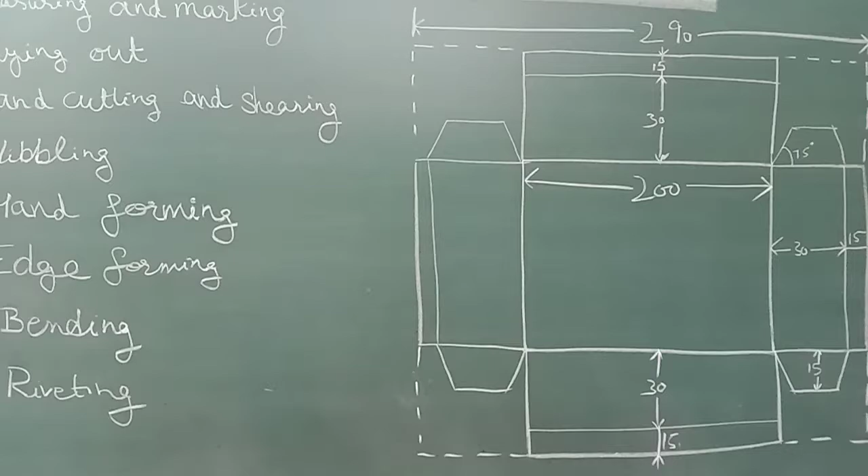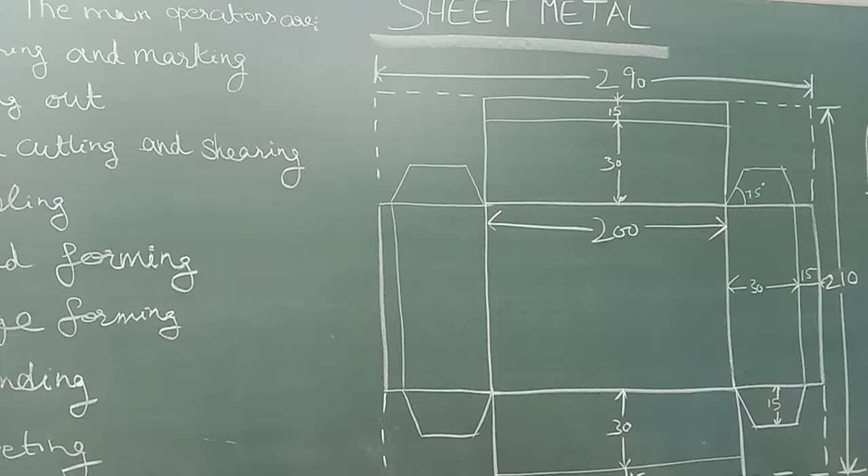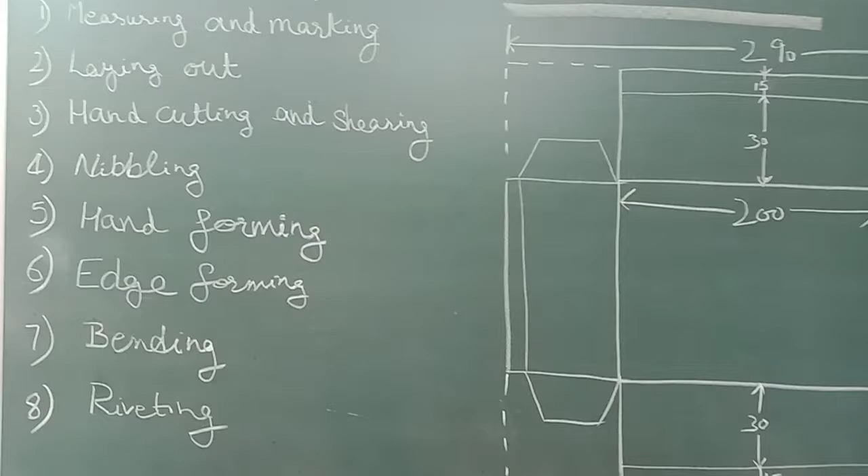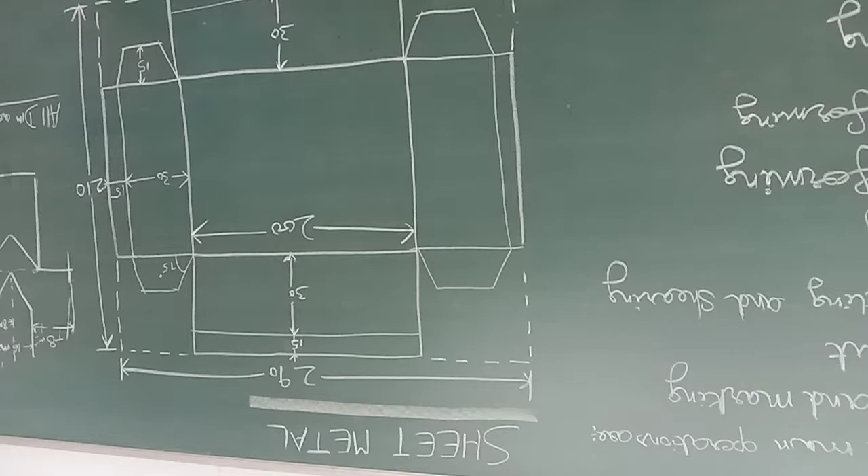And today we are all present in our sheet metal shop. Sheet metal shop is an important part of workshop practice, and sheet metal is associated with working of thin metallic sheets with the help of hand tools and simple machines. While doing work in the sheet metal shop, it is necessary to know the working of hand tools and simple machines. Sheet metal finds its application in a variety of work in houses, agriculture implements, transport, etc.

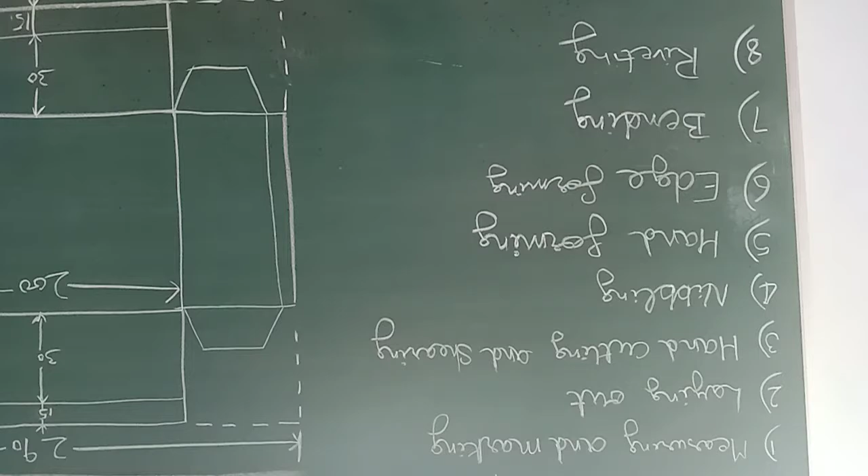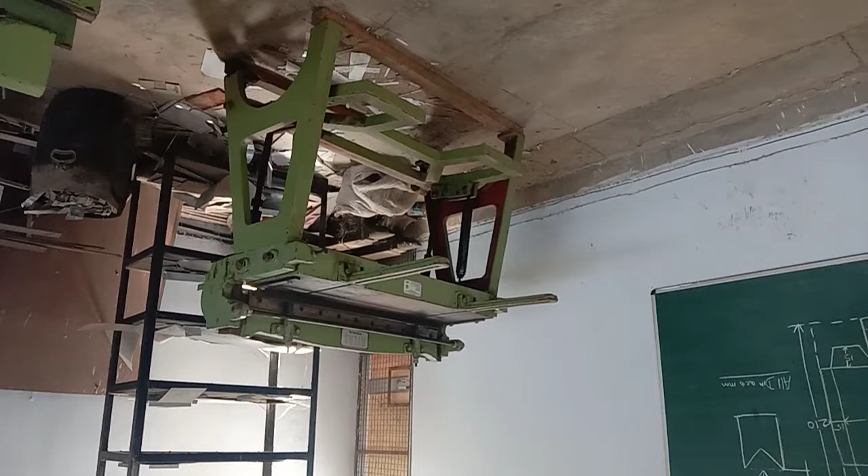In sheet metal shop, we use a variety of sheets, that are ferrous steel sheets and non-ferrous sheets, and steel sheets are further subdivided into categories: coated sheet and uncoated. Coated sheets are galvanized and uncoated sheets are plain sheets. Now, the sheets we use are defined further. First are steel sheets, mild steel.

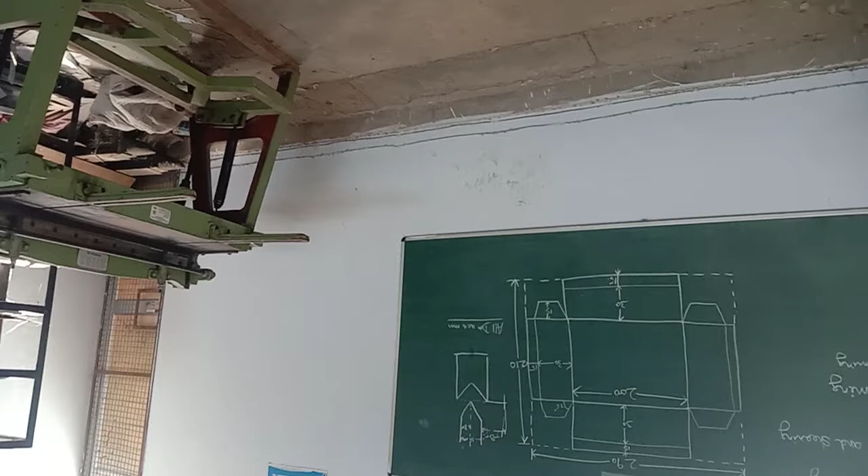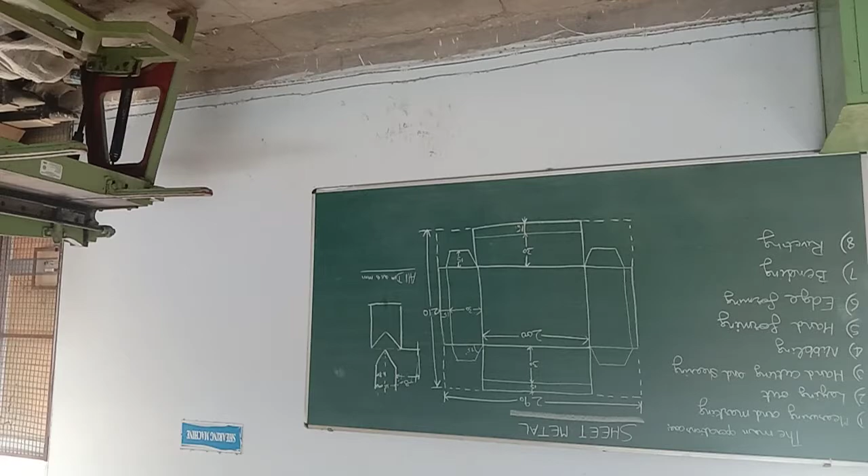Mild steel sheets, due to being uncoated, are non-resistant to corrosion. By protecting them with paint, these sheets are used for making water tanks, fabrication, and agriculture implements. Now, further, we go to stainless steel sheets. These have a silver chrome appearance and are high grade steel with chromium, nickel, and traces of manganese. The stainless steel sheets are easily welded. It is used in dairy, food processing plants, etc.

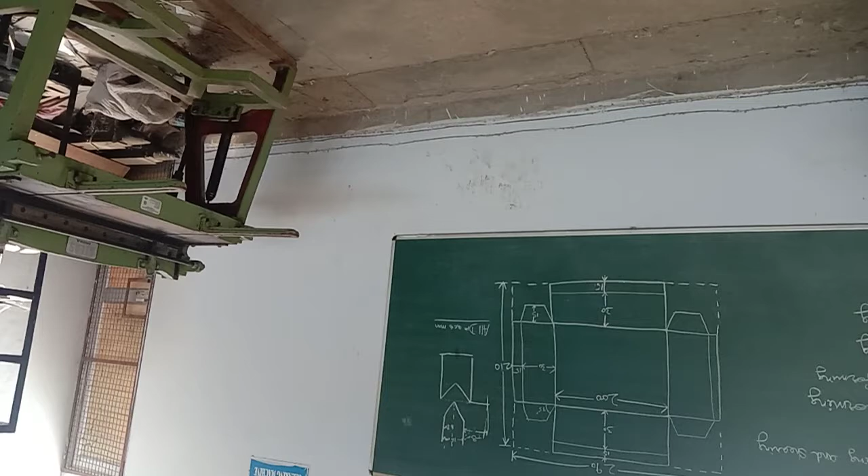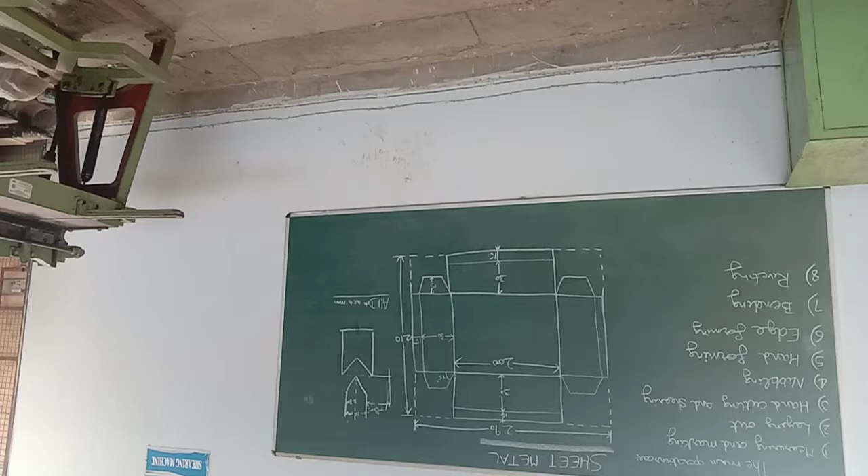Now we move further to galvanized iron sheets, also known as GI sheets. And in our sheet metal shop, we use GI sheets. It is a soft steel sheet coated with zinc. Due to zinc coating, these are corrosion resistant. Welding is not easy on GI sheets, and these sheets are used for making AC ducts, roof flashing, boxes, buckets, coolers, etc. Now, tin sheets.

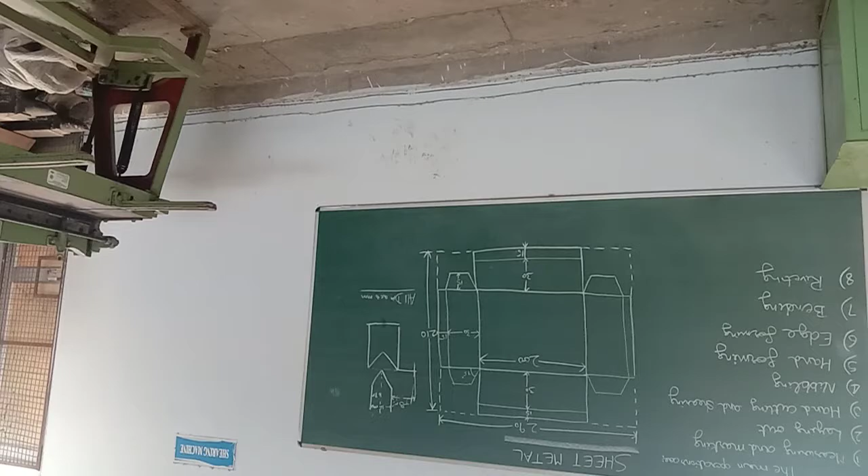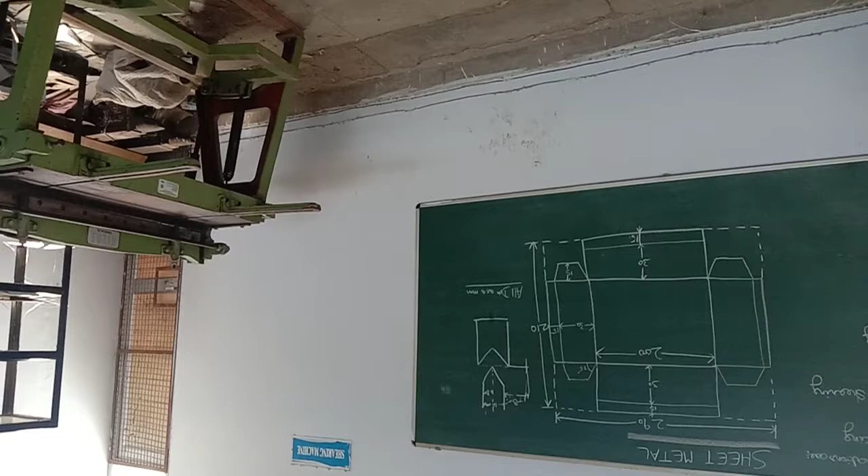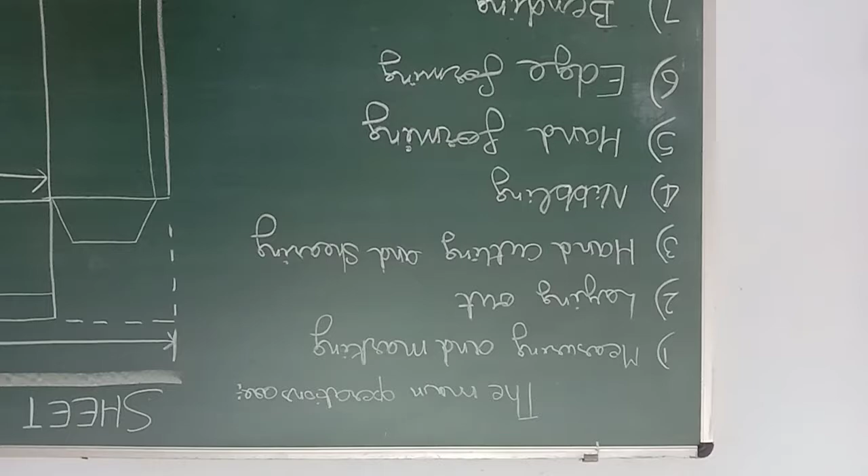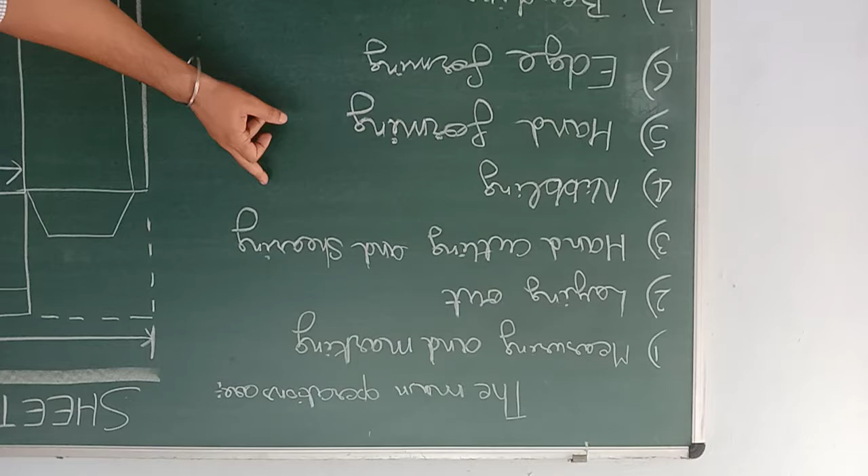In sheet metal shop, while making a job, the main operations are: measuring and marking is the first operation. Second is laying out. Third is hand cutting and shearing. Fourth is nibbling. Nibbling is done with the help of a nibbling machine. Then hand forming, edge forming, bending, and riveting. Now we come to our first point, that is measuring and marking.

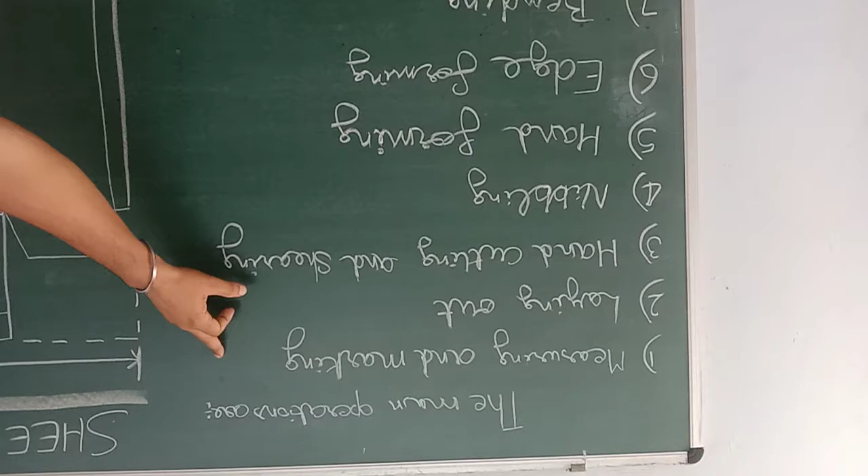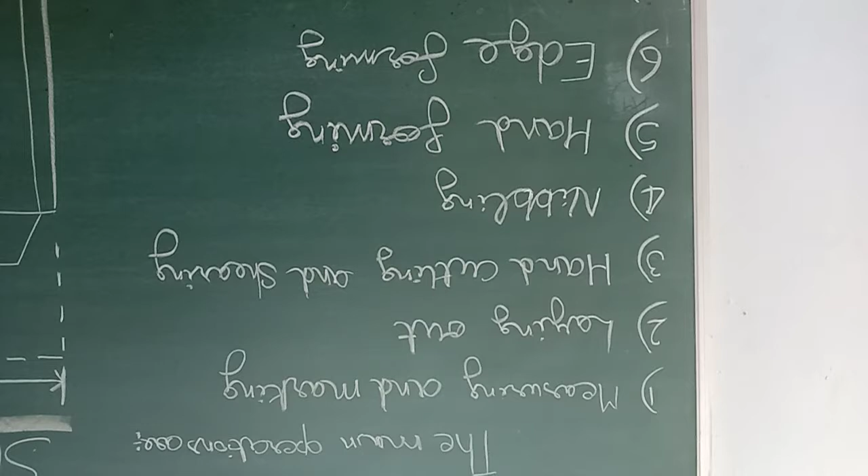Sheets in the market come in big sizes, but the size required by us is according to our job. So the big sheet is cut into smaller pieces according to our drawing or our component. The size is first marked on the large sheet. Marking is done with the help of marking tools. Now, after marking, remember to give a little allowance for cutting, so that the cut piece is not undersized.

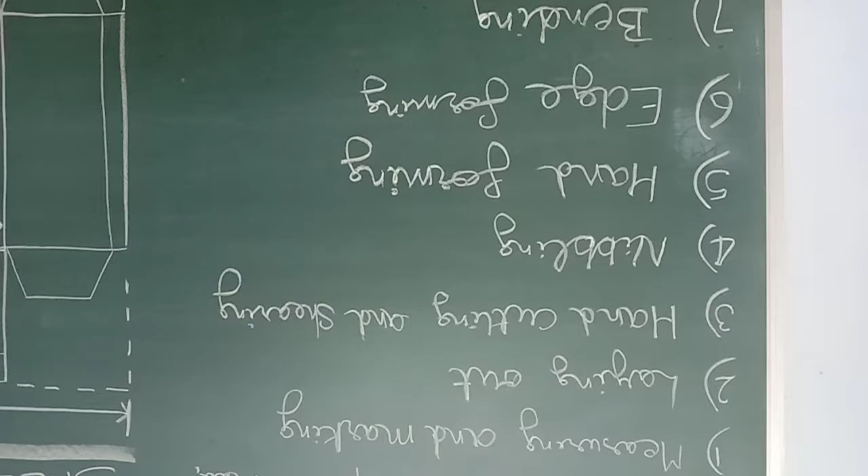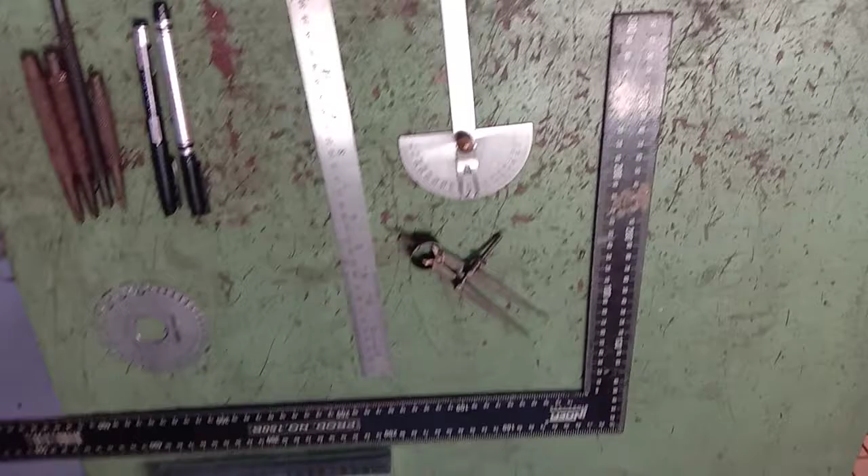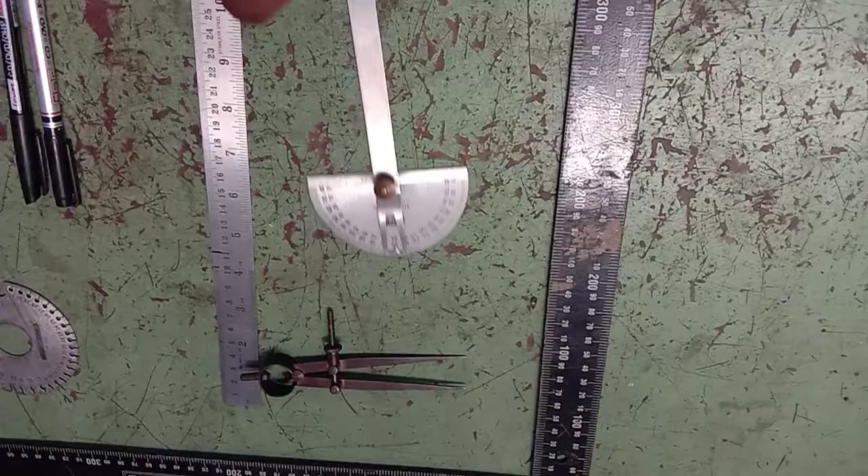In measuring and marking, in sheet metal shop, we use measuring and marking tools. We use different types of measuring tools like steel rule, steel square, divider, bevel protractor. These are all measuring tools. With the help of these tools, first we mark our dimensions on the sheet before moving further. Steel rules are available in a variety of sizes. The rule could be a steel foot rule, folding rule, or tape rule.

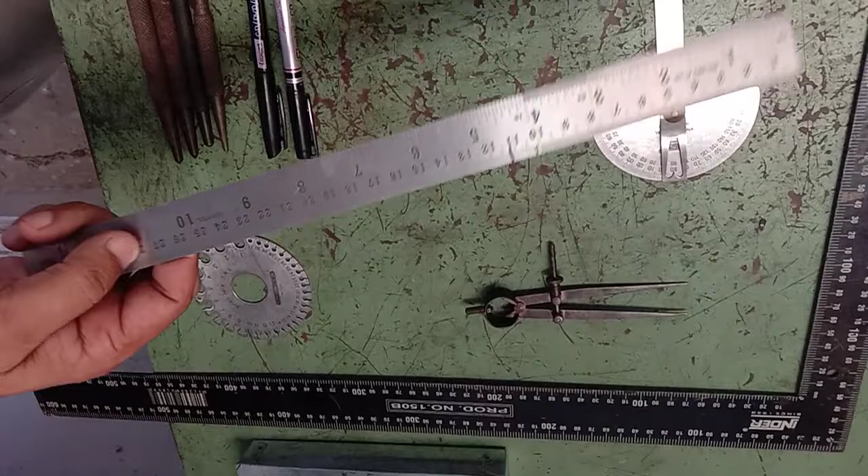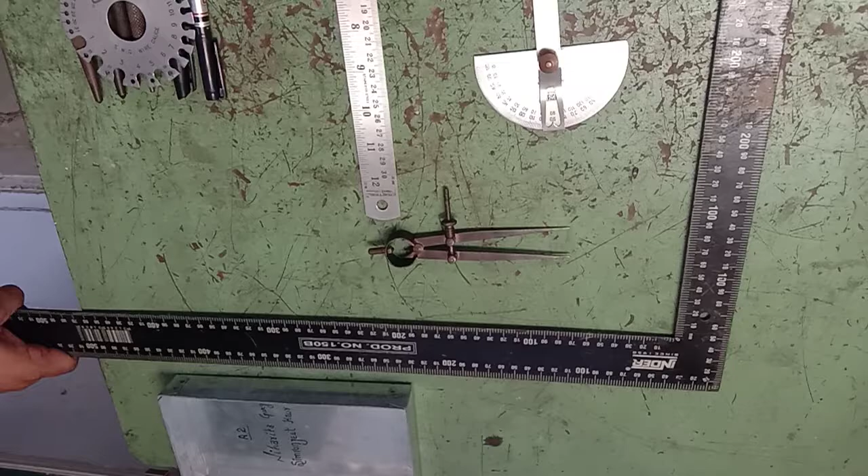Steel square is an L-shaped scale. It is used for making square corners and checking and making right angles. This is a wire gauge, sheet wire gauge. Here is numbering 1, 2, 3, 4, and on the opposite side it is given in mm. 1 means here is 1 and it means 7.62 mm. It is used for measuring the thickness of sheets.

Punches. We mainly use two types of punch. This is center punch and this is prick punch. Center punch is used for marking the location of a point and the center of a hole to be drilled. Its tapered point is ground to a 90-degree inclined angle. Prick punch is used for making an indentation mark for locating the center position for dividers, having an inclined angle of 30 degrees.

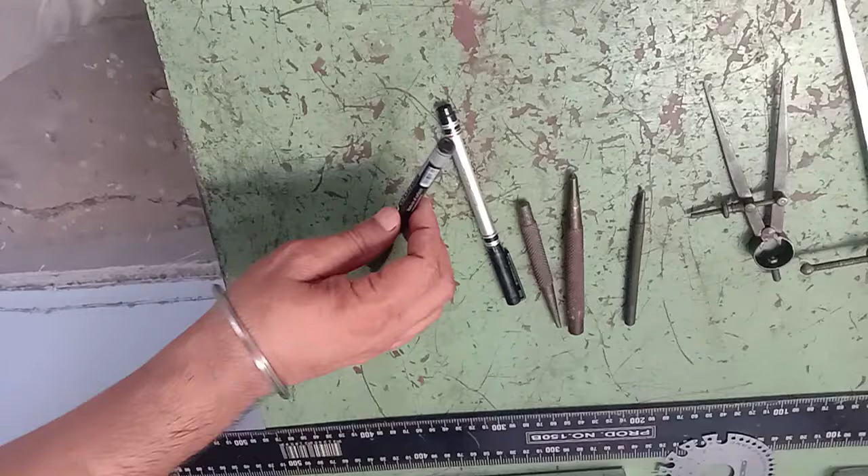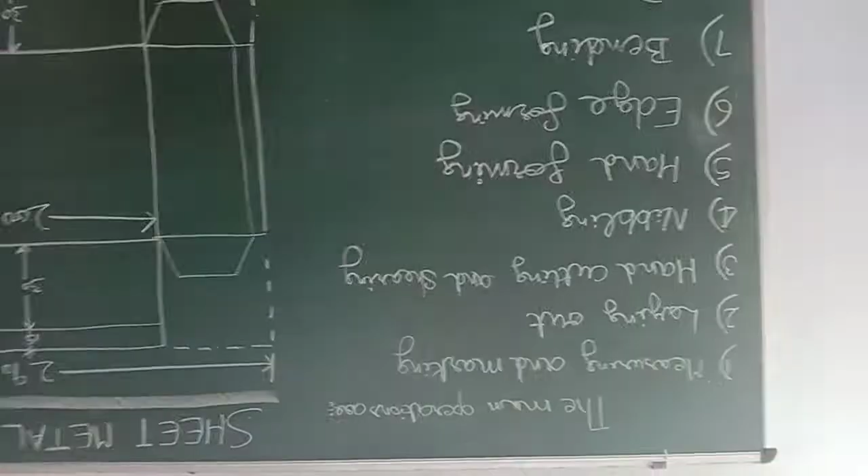We also use markers. These are permanent markers, and markers are used to highlight the lines and points that are marked by scriber and divider, because these lines are not visible, and with the help of the marker we see the lines clearly. Now the second step of our main operations is layout. Layout means scribing the drawing of the component on the sheet together with the added allowances for overlapping, bending, etc., which when cut out of the sheet and folded and joined will give the required component.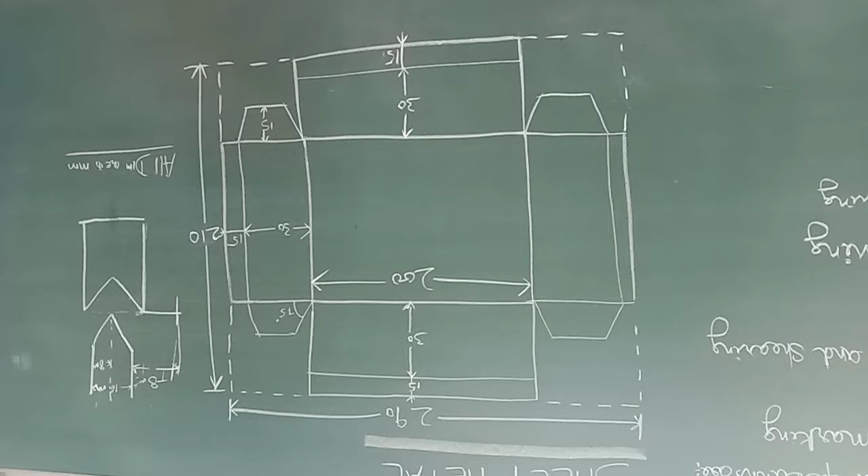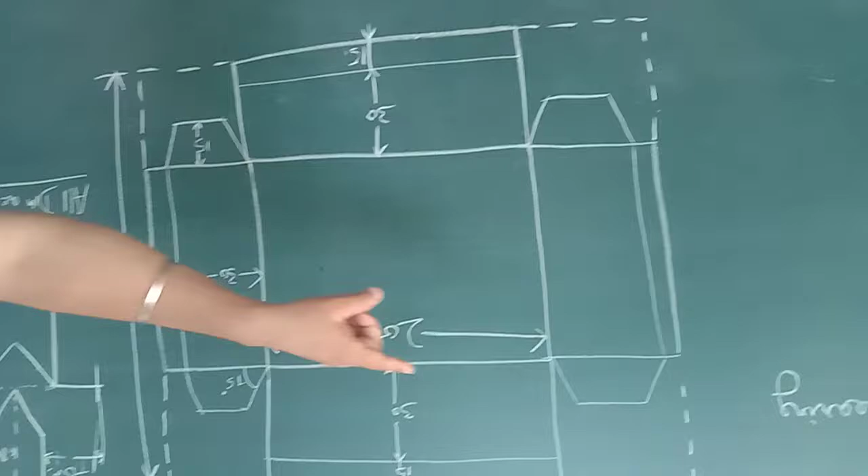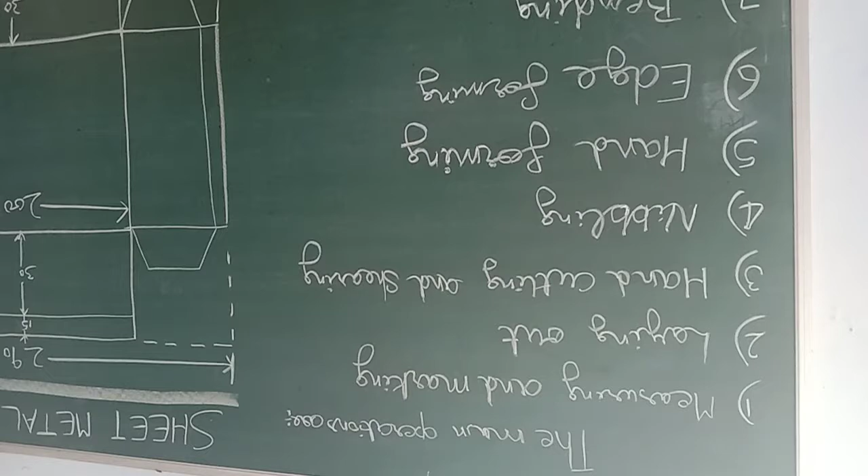This is our drawing of the box which we require. All the dimensions are in mm. First we have to cut the major dimension, that is 290 and 210 mm, from our blank sheet. After layout we come to our third point, that is hand cutting and shearing. As you see, it is hand cutting. The tools are used by hand and are simple tools.

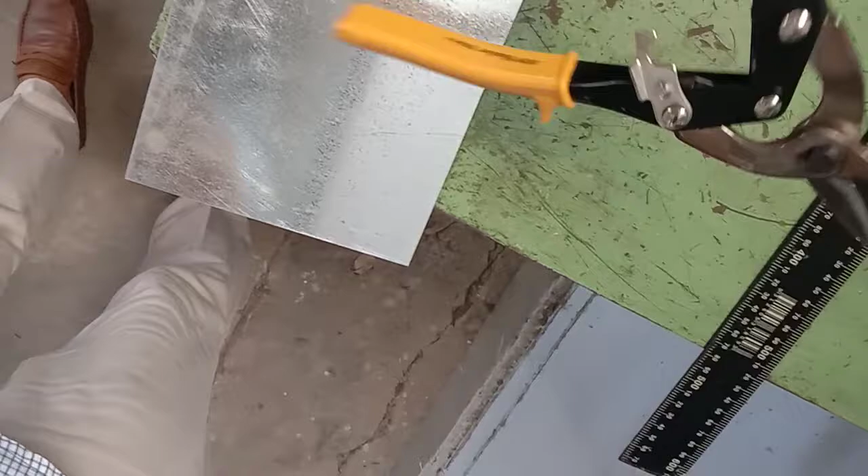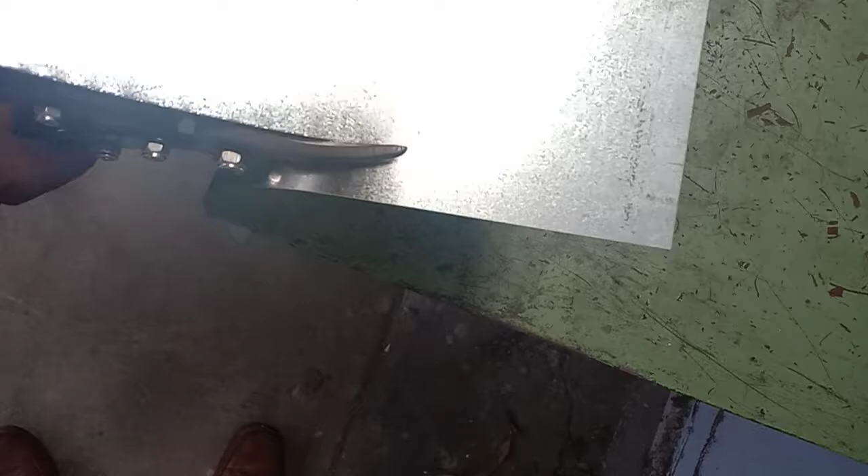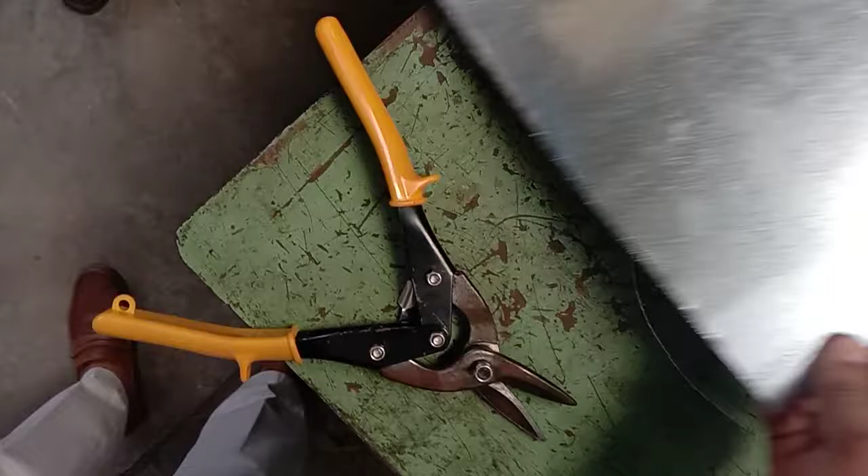Cutting and shearing means cutting the desired shape out of the blank sheet. Cutting is done with a number of tools. Mainly for cutting sheets we use straight snips. This is our straight snip. For cutting straight lines we use the straight snip. It is used to cut 22 wire gauge or lighter. Straight snip is used for cutting straight lines. Like this. This is cut with the help of the straight snip. Straight.

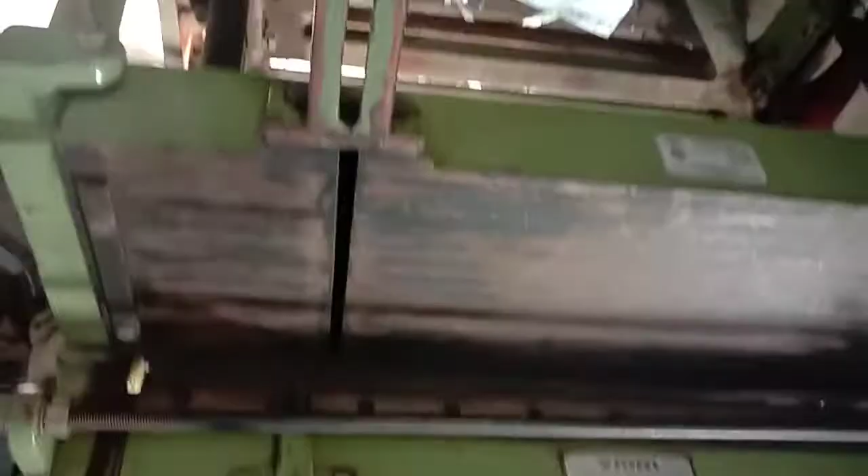To cut sheets of thickness more than 22, we use the shearing machine. This is our shearing machine, and it is foot operated for cutting sheets. In the shearing machine, the force used to cut the piece is shear force, and it is foot operated.

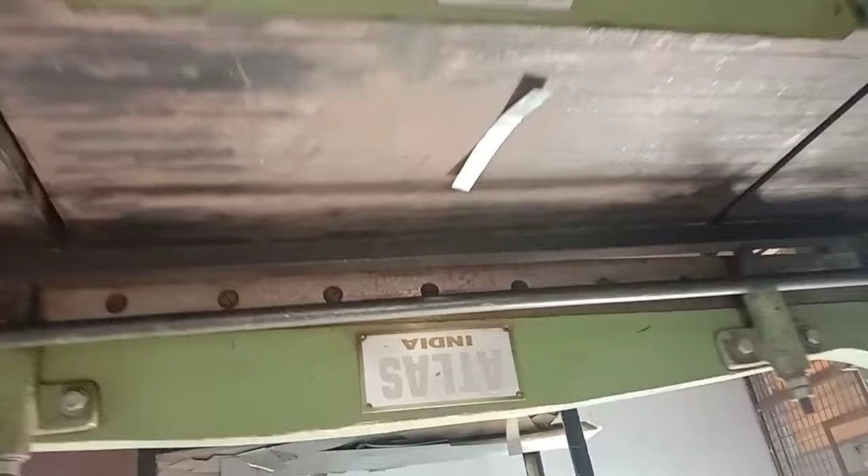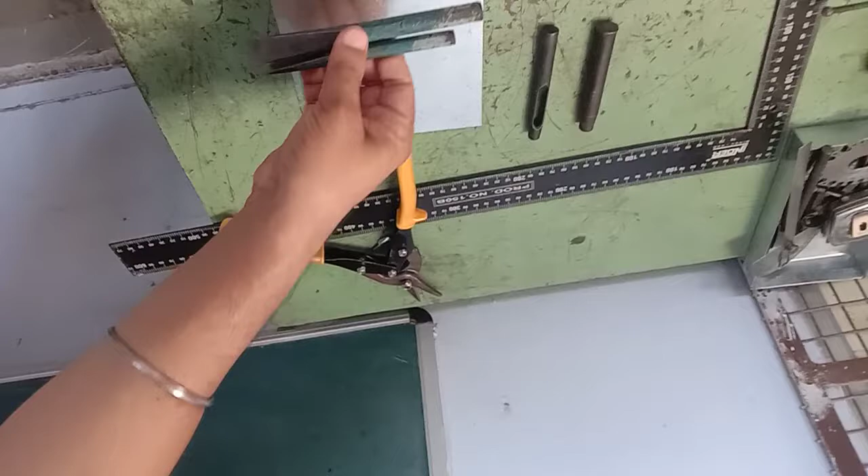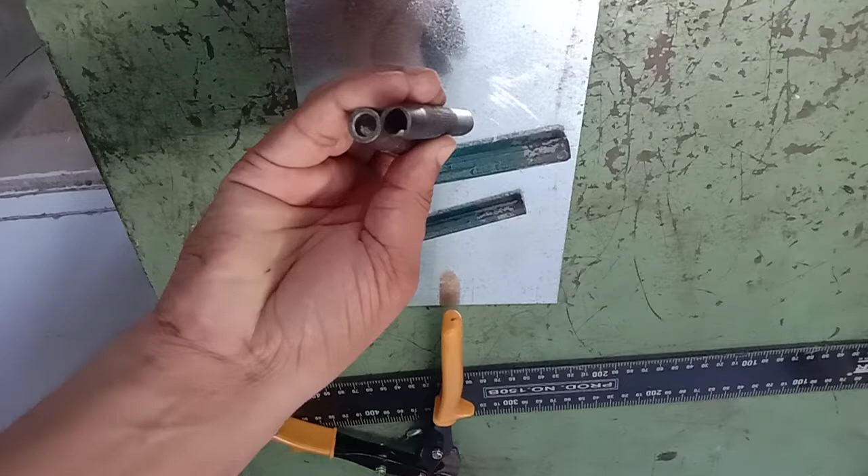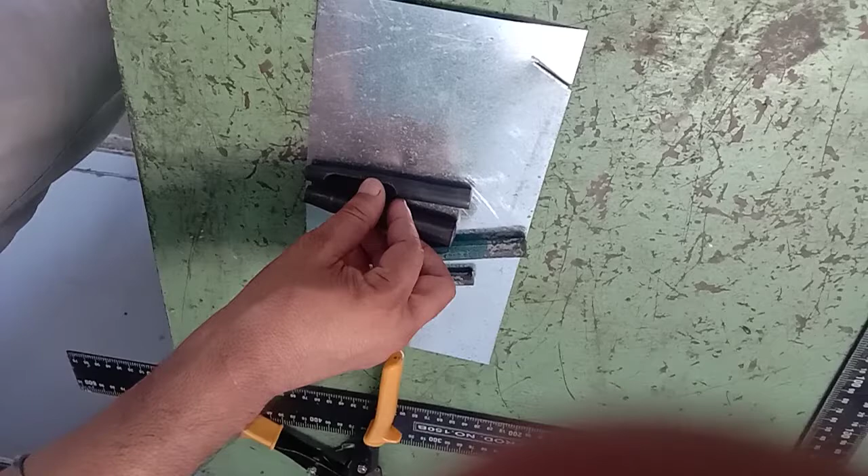Now, after the straight snip, we come to chisels. Chisels are also cutting tools, generally used in sheet metal shop for cutting rivets and bolts. These are hollow punches. When circular holes are cut in thin sheets, this hollow punch is used. The sheet should be placed on wood or a thick block to avoid chipping of the edges of the punch.

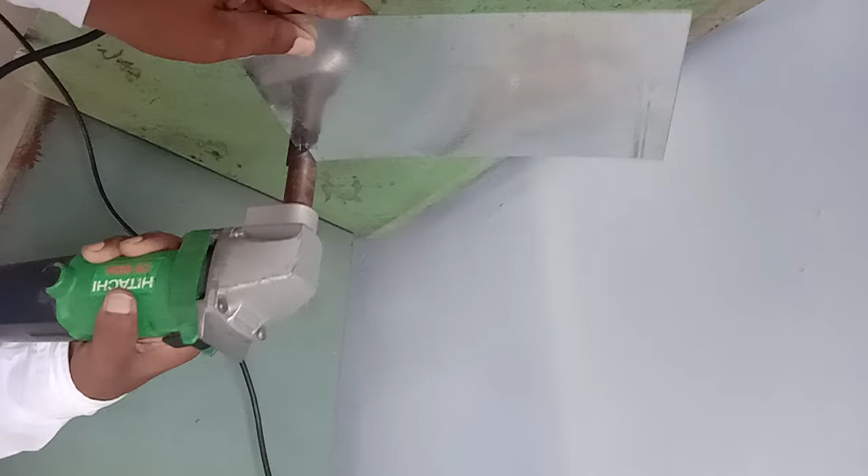Now students, we come to our fourth point, that is nibbling. Nibbling operation is done with the help of a nibbling machine. The nibbling machine is an electrically operated hand machine used for cutting irregular shapes. Like this.